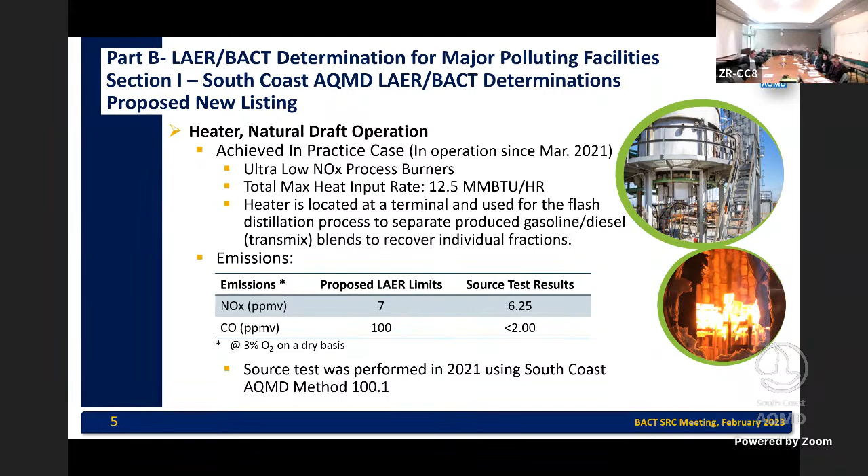The third BACT determination is a relatively new technology, although the main technology is not that new. It has been used for other applications since 1960. But this is a linear generator for non-emergency electrical generation, and this BACT determination is solely on natural gas. The technology is a free piston. They call this system free piston because there is no crankshaft connected to the rod, and that technology helps it reduce all of the friction that reduces the efficiency.

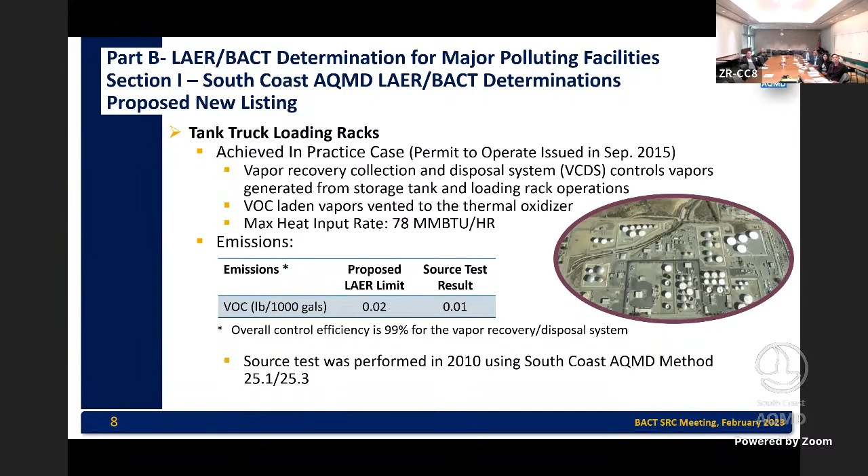And the VOC emission limit is 0.02 per 1,000 gallons of the fuel. And it has been source tested and also shows compliance with the permit limit. And in addition, we have an overall control efficiency of 99% for this vapor recovery system. And this is another proposal that we brought to you for this round. Next slide, please. Okay, so I'm going to hand it over to Bettina to go over the BACT determination for major source from other air districts.

And just a quick one. So Bettina, it's her first SRC. She's part of the BACT team now. She was just promoted to senior engineer in the BACT team. So she'll be helping out Bahre. So Bahre is the supervisor and Bettina is the senior in our BACT team. Go ahead, Bettina. Thank you, Oscar.

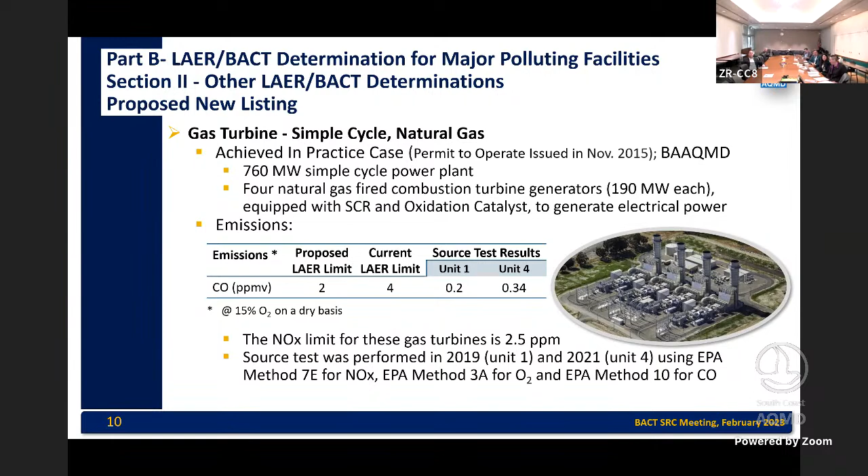Okay. Thank you, Bettina. So now let's open it for the questions. So first of all, let's go through the BACT SRC members, and then we will open it to the public. I see David, you have a raised hand. Oh, sorry, David. Before that, let's go to Gary, because I guess you had a question on the heater, Gary, right? The second slide, and then we will come back to David.

Yeah, my question was whether the 7 ppm number that you showed in the slide is the current permit limit for that facility?

It is about the heater, right? Correct, about the heater. Yes, that's the current limit that they have right now using this new type of technology burners. Okay, and was there only one source test done of that unit, or do you have multiple source tests? For this one, because they did it back in 2021, so far I know one of them has been reviewed with our source test staff. I'm not aware of the next one yet, but we can look through it and see if we can get the second one by the next BACT SRC meeting.

The reason why I'm asking those questions is because the source test results are only about 10% below the proposed limit. And if you look at all of your other listings, you've got much larger compliance margins demonstrated for all of those other listings. And 10% is getting close to the uncertainty in the method, not the accuracy, but the uncertainty. And so I would think you would want more than just one source test at 90% of the permit limit before you conclude that this is an appropriate listing.

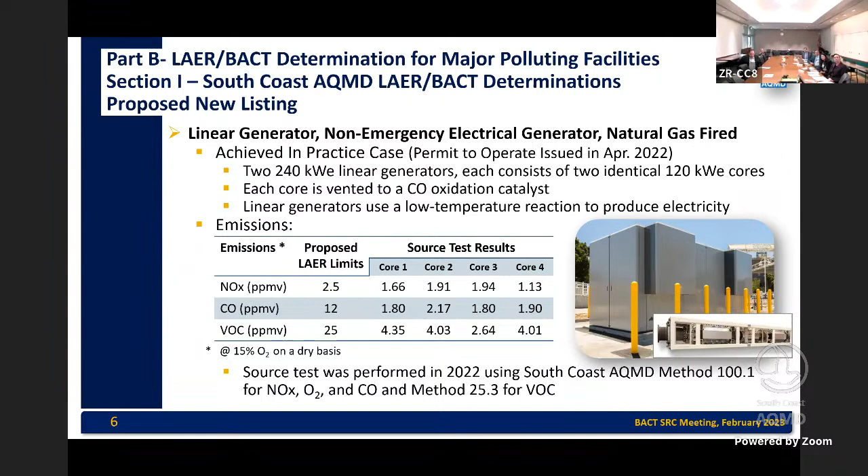And since you brought this question, usually before the second BACT SRC meeting, we provide the SRC members and the public with our BACT determination forms, which include all the details about those determinations. So there is more technical information regarding each of them. So we will include them in that one. But to just answer your question, for NOx and CO, right now the permit limit is at 24 hours, and for SOx it is 72 hours. But again, you will find all of those details in the BACT forms for every single one of those determinations.

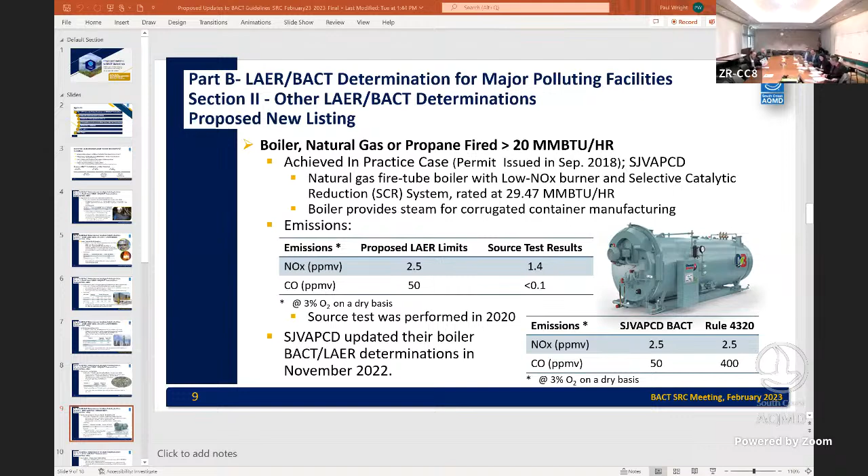Okay. I see, Patty, you have a raised hand. Yeah, on 6C, the upper bound of the boiler rating, can you comment on that? The question is, what is the upper bound of the boiler rating? Sorry, I'm just trying to get to slide 9. Just to clarify, Patty, are you referring to the boiler greater than 20 million BTU? Yes. So, upper bound of the boiler rating. For this one, yeah, we need to come back to you.

I don't have it. Basically, we are just incorporating a permit that San Joaquin has issued at that limit, and it's been achieved in practice. So that's why we have a category greater than 20 million BTUs. We're just incorporating an existing permit which is achieved in practice into our BACT guidelines. But do we have anything higher than 20? They do have higher than 20 million.

Actually, they established their BACT determination in November 2022, and they put a very good document together, including several boilers smaller than 20 million BTU and larger. They also have 2 appendices, which include the summary of source test results for every single boiler. So we looked at that, picked a few, asked for the permit to operate and more details on the source test, and that's how we established that. For the boiler less than 20 million BTU, the NOx limit is 5 ppm, and for the larger one it's 2.5.

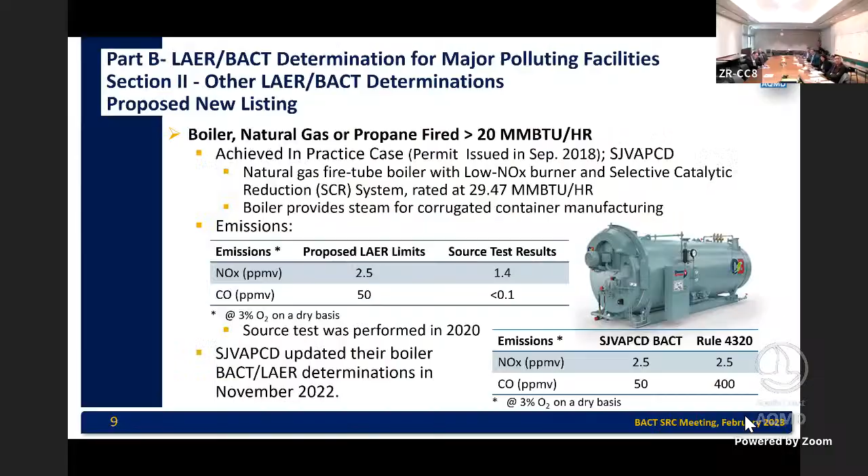This one, there was a warranty from the manufacturer on the sulfur limit, H2S emission limit from the sulfur recovery unit at 2.5 ppm. But in terms of, I don't think so, it is based on natural gas. The only ones are NOx and CO for the incinerator. But the SOx, for more details, we need to go through the permit. And if you provide us with your written comments, then we can reply to you regarding this issue.

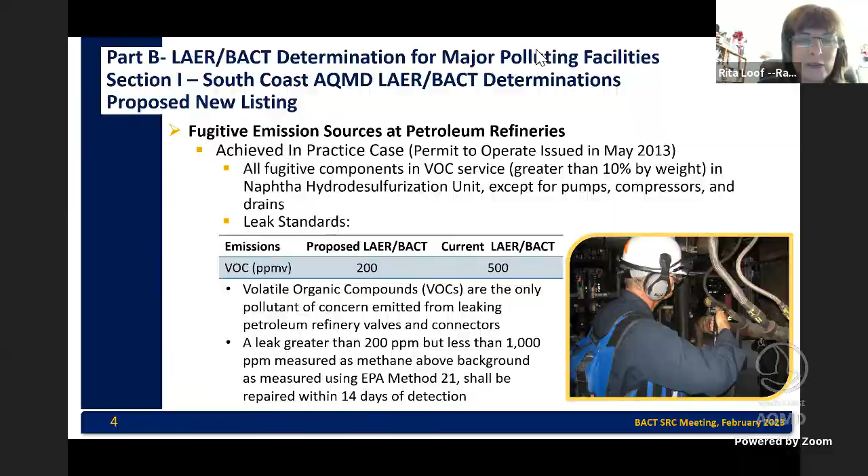Thank you. I just wanted to underscore a point that Carl made because it deserves recognition, and it extends to a broader policy issue: the district rules are not really well equipped to handle pollution prevention processes. In my experience, the mold where equipment or processes fit well is when you generate a VOC and destroy it. But what happens when you are not generating that VOC in the first place? Carl was mentioning a situation specific to the slides presented, but we deal with the same issue of having very low VOC levels that are barely detectable, where there is no test method that can measure these very low levels. So as we move forward with policy making, I would hope the district is cognizant of this issue, because ultimately what the district wants is to reduce emissions. If we're not accommodating the technologies bringing that forward, we shoot ourselves in the foot if we don't approach the system in a way that keeps the big idea of emission reductions front and center. Thank you.

So just to quickly address that, Rita, thank you for the comment. We did add pollution prevention to the guidelines a few years ago, so that is taken into account for BACT guidelines, but your comment is noted. Thank you.

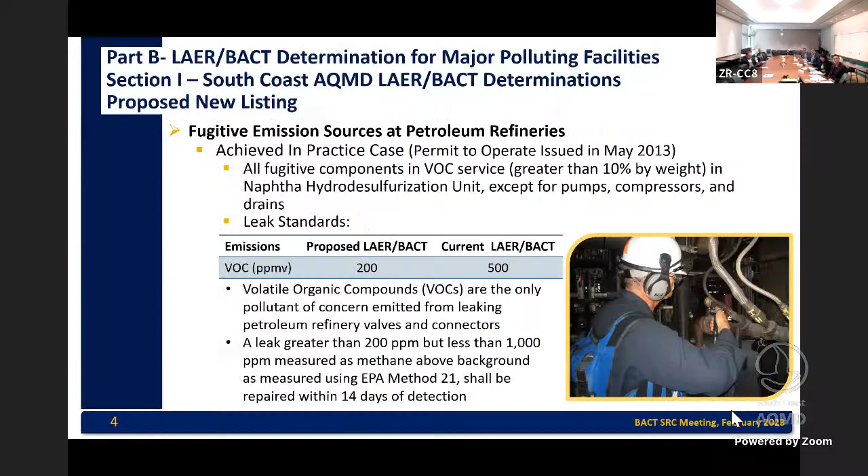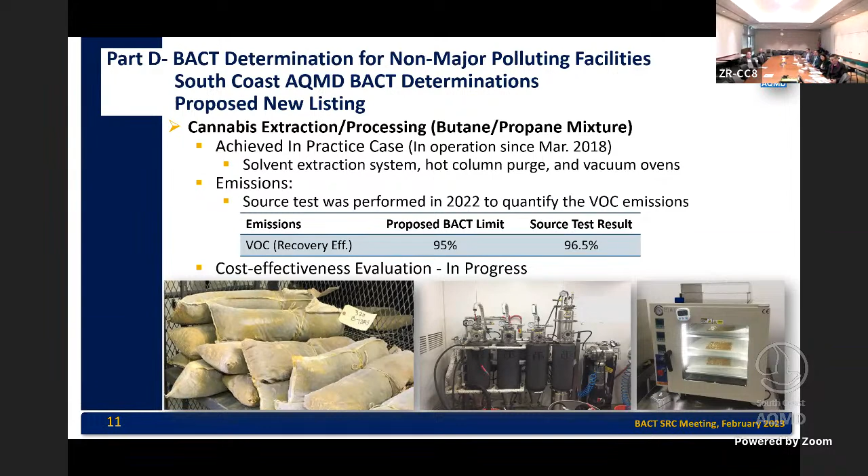For cost, because this is a Part D determination for a minor source, we are required to do the cost effectiveness analysis based on the Health and Safety Code. So we got some cost information from the manufacturer, and we will evaluate those costs before we propose it to the next BACT SRC meeting to make sure it is cost effective for this type of facility. Next one, please.

The last new BACT determination is for the crumb rubber asphalt oil blending system. This facility produces asphalt concrete. When they produce the concrete, they use a mixture of asphalt oil and crumb rubber instead of just asphalt oil. The benefits of using crumb rubber are that they can reduce asphalt oil usage, increase the elasticity of the final product, and avoid worrying about recycling rubber that would normally go to landfills.

This facility uses a granulated carbon adsorber to control the VOC emissions from the tanks. They have two tanks for mixing the crumb rubber and asphalt oil. The VOC emission from the tanks first goes to the primary canister, including the carbon adsorber, with an efficiency of more than 90%. Then the VOC leaves the primary canister and goes to the secondary one for further control.

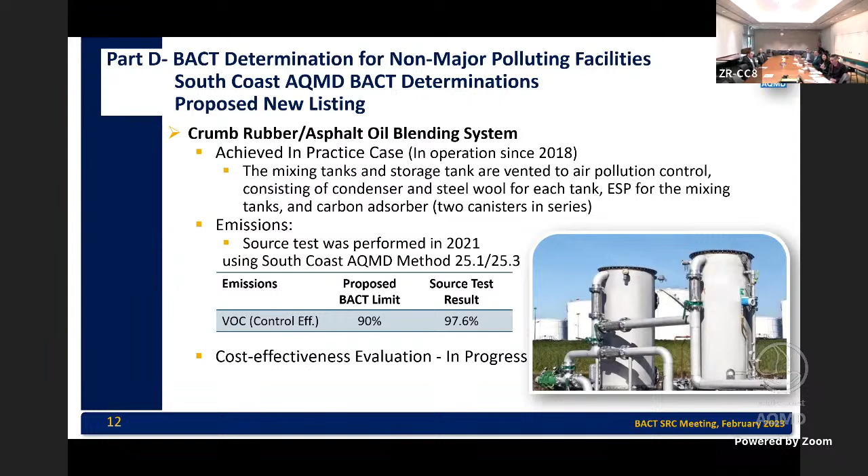This facility has been operating their carbon adsorber since 2018. Based on the mass emission inlet and outlet data they provided, which has been source tested, the results show about 97.6% efficiency. So we are proposing using this carbon adsorber at 90% control efficiency for this type of operation. Again, since it is a minor source BACT determination, we will look at the cost data to make sure it is cost effective before we propose it in the next round.

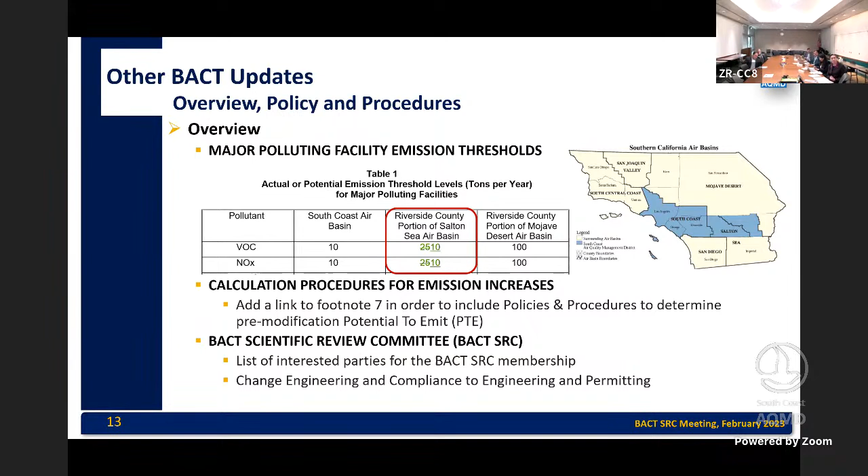So for our cost effectiveness, every quarter we have to update those values, and we get these values from something called the Marshall and Swift Index, which is a valuation service that is responsible for making an appraisal guide for developing replacement costs, depreciated values, and insurable values of buildings and other improvements.

Next slide, or do you want to take Bill's question? I guess let's wait till the end. I guess you have maybe 1 or 2 more slides, then we will stop and go to questions.

In the rest of the updates here, these 2 rules are currently in the process of being SIP approved. So we're waiting on those in order to add to our guideline. And these 2, aggregate dryers and the metal melting furnaces, were previously in Rule 1147, and now they're getting their own sections. So we need to make sure that we update our guideline to reflect the current date of the rule, if it's been updated.

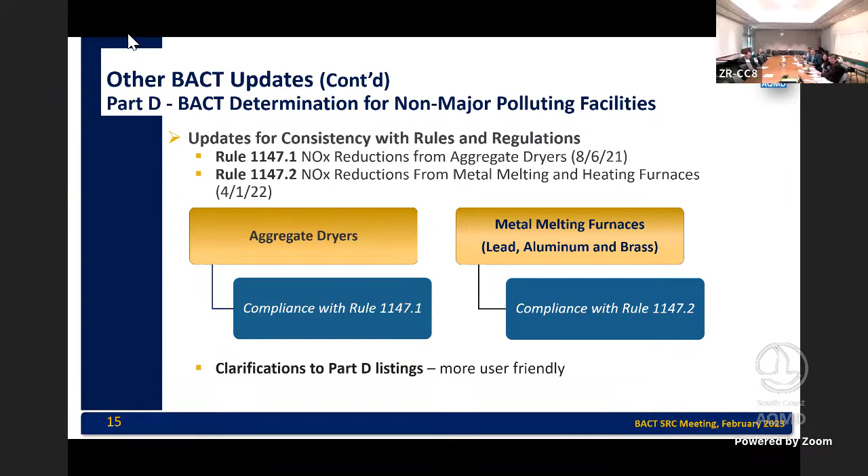Okay. So the first one is the BACT technical assessment for biogas flares. These are other topics we wanted to share with you. So in January 2019, South Coast adopted Rule 1118.1, which applies to facilities operating non-refinery flares and their emissions. So one of the resolutions added on the adoption of this rule was to monitor those types of operations.